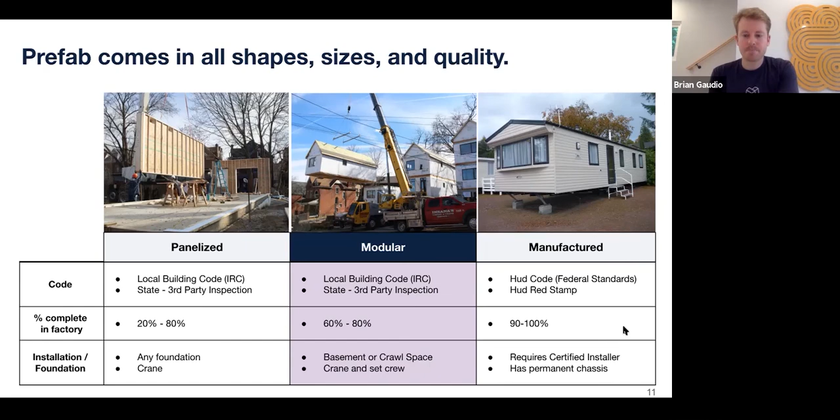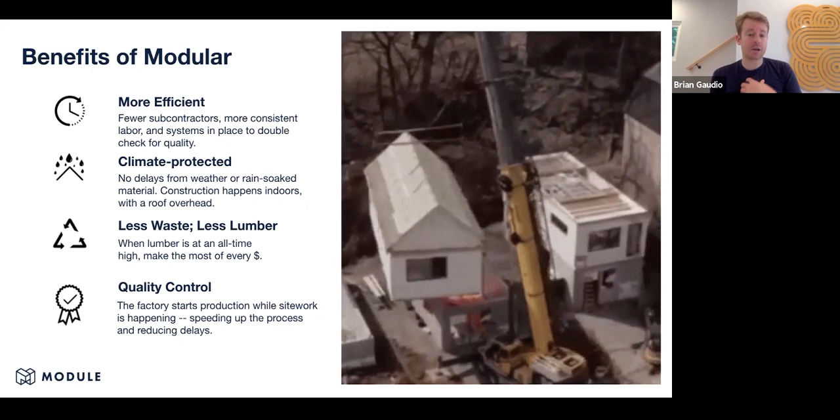So, the benefits: obviously you're going to be able to build faster — that's really one of the main benefits. At the same time you're building the foundation, our factory can be building the actual houses themselves. And there are fewer subcontractors to handle — instead of 20-some subcontractors, you effectively have one super sub, which is the factory handling a large component of the project.

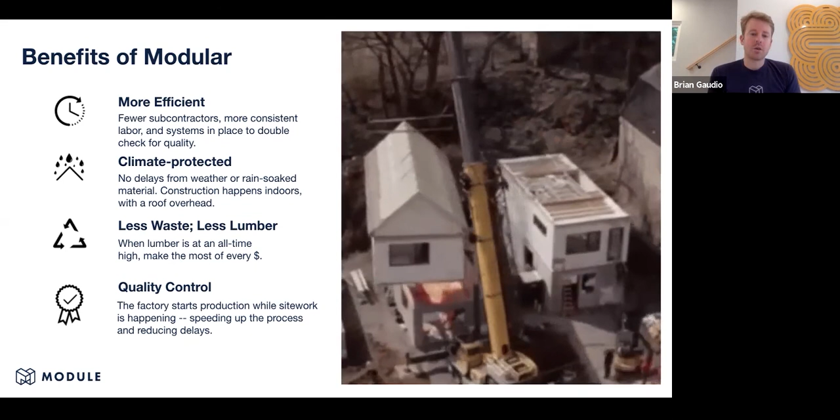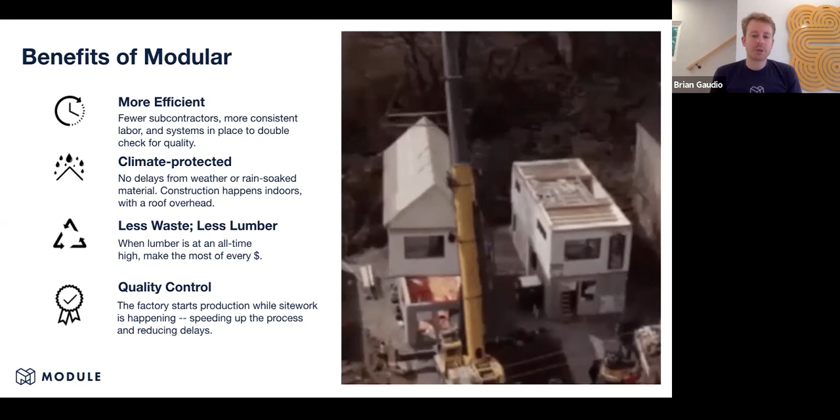If you're building in a climate with weather delays from snow or rain, modular can be a great way to short-circuit that, since you're building in a climate-protected environment. And there's less waste from a sustainability perspective — we don't have a dumpster. If you look at that video, there's no dumpster there, because when you're building in a factory, they can control the waste, resulting in much less on-site waste. So those are some of the benefits of modular.

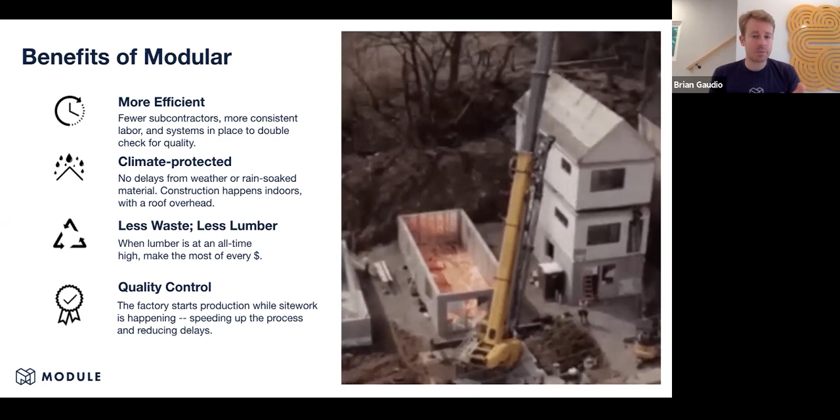It's not necessarily cheaper — that's one common misconception, that modular has to be cheaper. We actually don't think that's the case on projects, generally speaking.

Why mixed income is important: for those of you in the affordable housing world, the previous strategy was to build concentrated large public housing towers in particular areas of the city. What that does is concentrate poverty. With mixed income, you can provide more amenities to the affordable buyer, because they might be in a neighborhood with a better commercial district or more neighborhood amenities than an area with a concentration of public housing. That's why we did the project, and why we think mixed income housing is important.

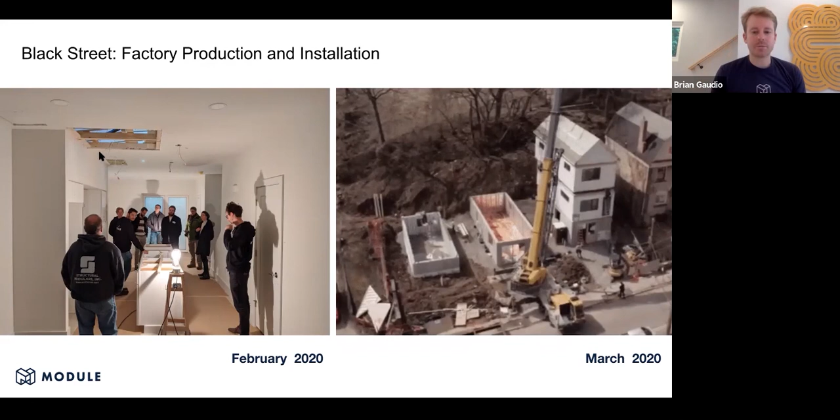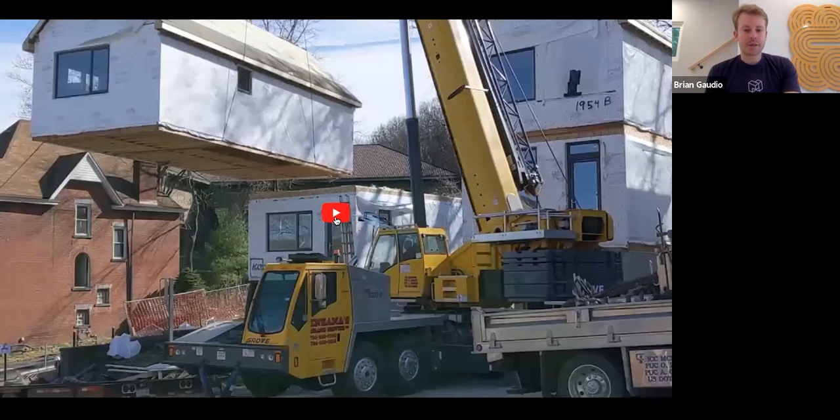This is a little video, Ankur, you can kind of talk through the process. This just has some good footage of the project, generally speaking.

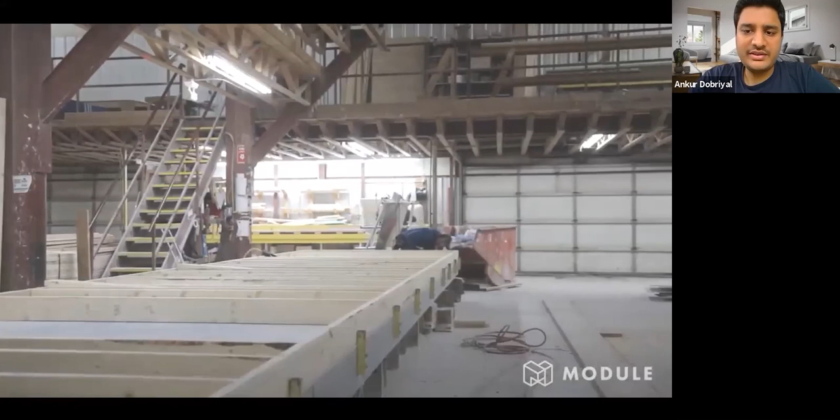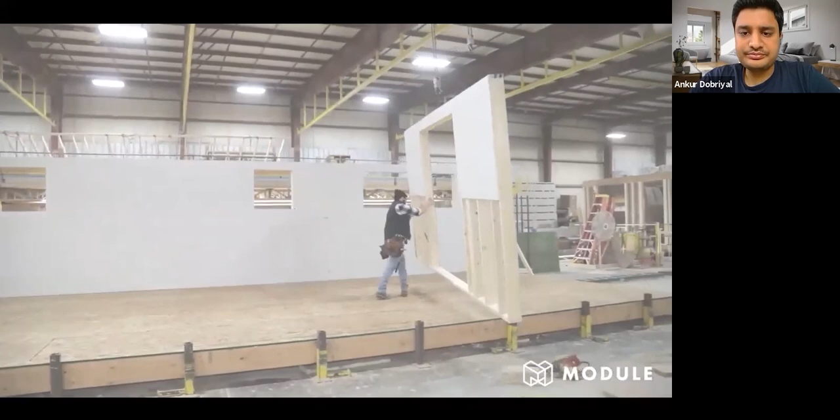So as you guys see on the screen, some footage from the factory. The guy is working on a floor. You'll see different stations that the factory has - that's the first station, where the structure basically gets built. You can see the walls being lifted and placed on the floor. All the exterior and interior walls get done at this station. Also the roof or ceiling, depending on which floor you're in, gets done - you can see a roof structure being placed on that house. At that point, the structure is complete.

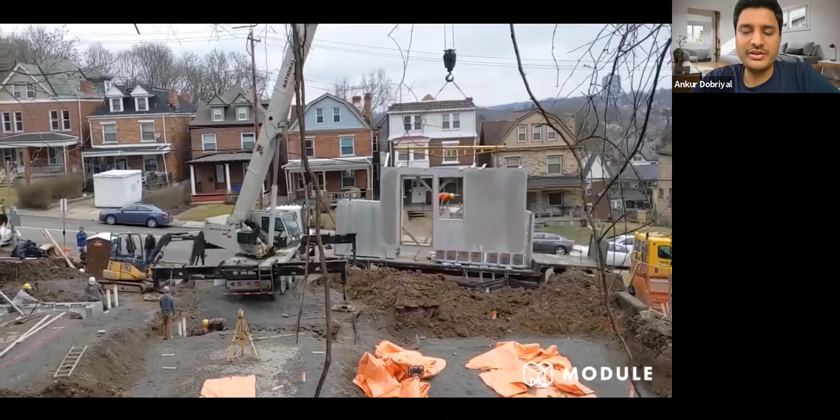This is basically a shot of the foundations being installed. We do a Superior Walls foundation, which is an off-site built foundation. The biggest advantage is we can do it throughout the year, so we don't have to wait for good weather to pour. This set in the video is from February, probably 30 degrees outside - middle of winter, and we're still able to do it.

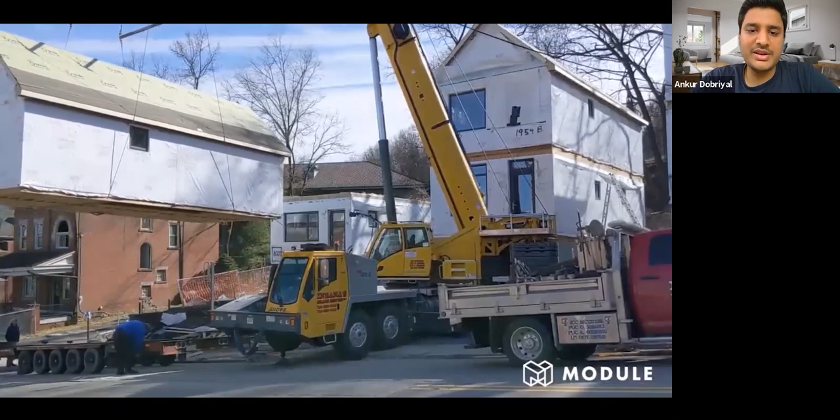This final footage is from when the boxes, or modules, are being set. You can see the roof is pretty much complete as the top box gets lifted and placed on the first box underneath. We had a crane on site and some traffic management stuff, but we were able to do this without really blocking the street, which was good and didn't cause a ton of interruptions for the neighbors.

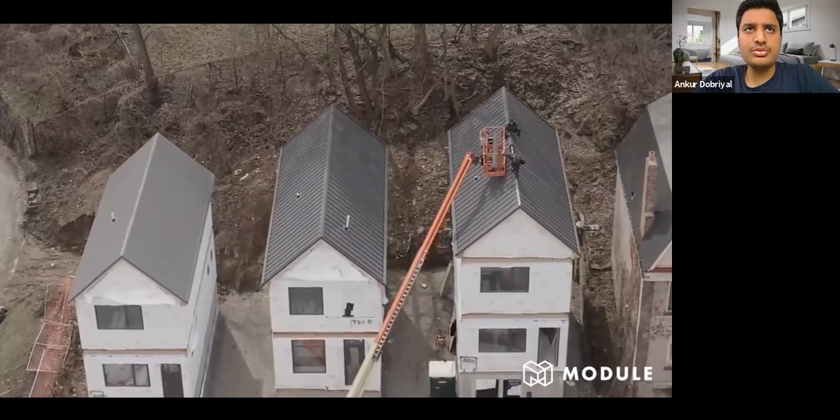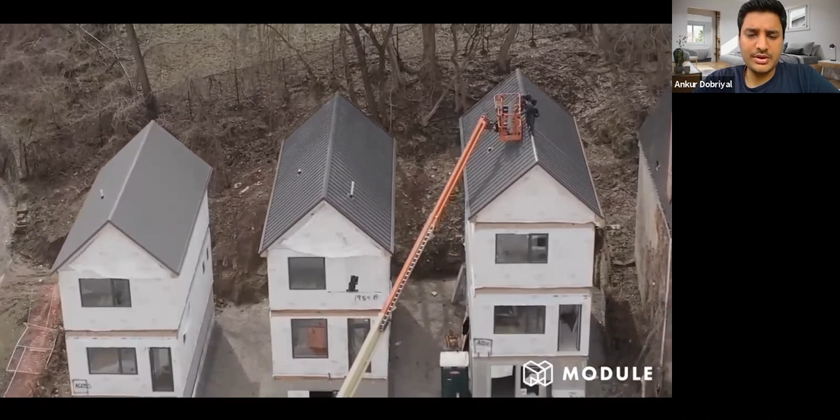The set, essentially what you see on the screen, took us 2 days to do. In total, there were 7 boxes. We have metal roofs on all these houses. I think roughly we could set 2 or 3 houses a day.

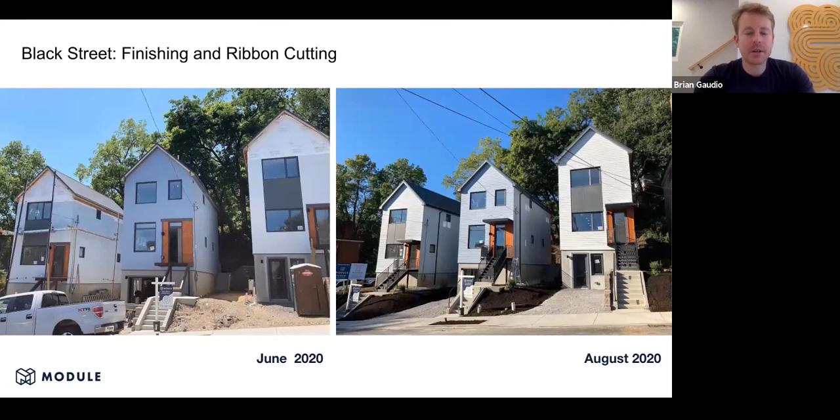In terms of on-site finishes, you'll see that siding, this was a Hardie lap siding completed on site, and then your stairs and stoops, railings and things, those are also done on site after the set.

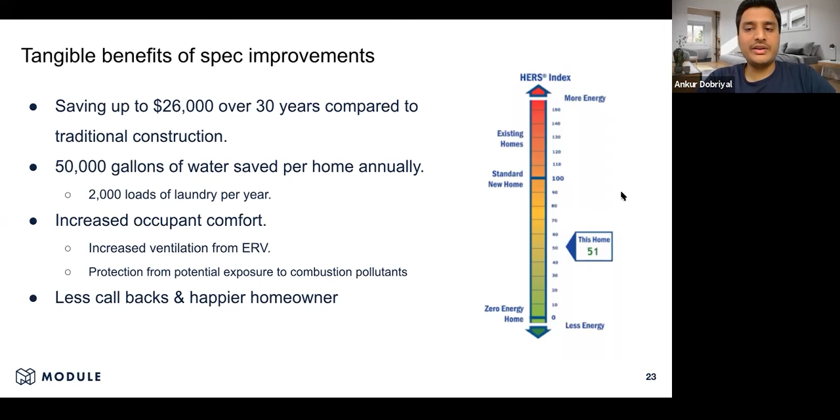So we'll go through a couple of things to consider if you have an infill site that you're looking at, or a piece of land that you're trying to evaluate. A couple of basic first things to consider when looking at your project: will that site support modular installation? We have to understand that boxes are going to come on a truck, so you have to think about the route from the factory to your site. Once they're on site, there's a lot going on—like you saw in that video, there's a crane, there's a set crew, there's going to be traffic. So those are important things to consider.

And so Ankur, let me pop these two sites, and you can just quickly talk through a good site versus a bad site.

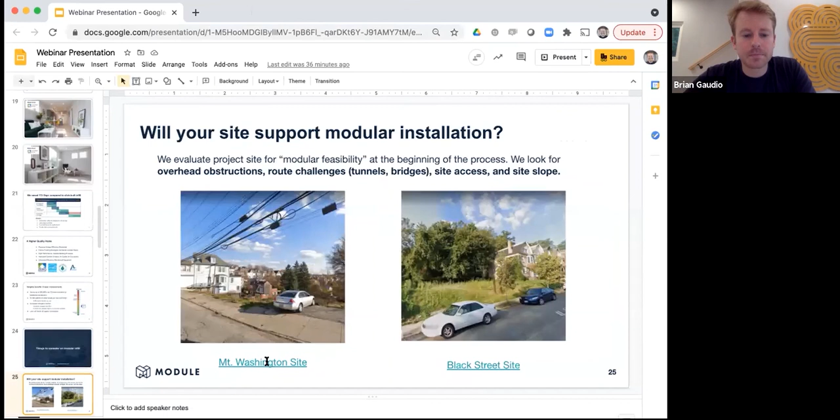So like Brian said, before we go into any site, we have to evaluate that for modular. Not all sites are built equally. So for example, this is a tough site. Right off the bat, you can see power lines right in the front of the property. For building a modular house, yes, you can sometimes lift over power lines, but something like this, which towers high, is hard to get around.

Something else on this site is it slopes to the back significantly. Now there is going to be a building in that corner before we start construction, so it's also going to be an access issue if we have to access from the back. Essentially, the drop from the front to the back of the property is about 30 to 40 feet, and such a drop makes it hard for us to get the crane and the truck to lift those boxes and place them on the foundations. That's why this site is particularly challenging.

Now, if this was a flat site, the power line in the front would still be a slight issue, but you could still go to the back and access the site from there. The slope just makes it worse.

The second site would be what we consider a good site. This is the site on Black Street that the houses we were talking about were built on. You can see no power lines. It's a corner lot, you have corner access. Corner access is not necessary, but it's obviously helpful because it gives you another way to access the site. We actually had a construction entrance through the back.

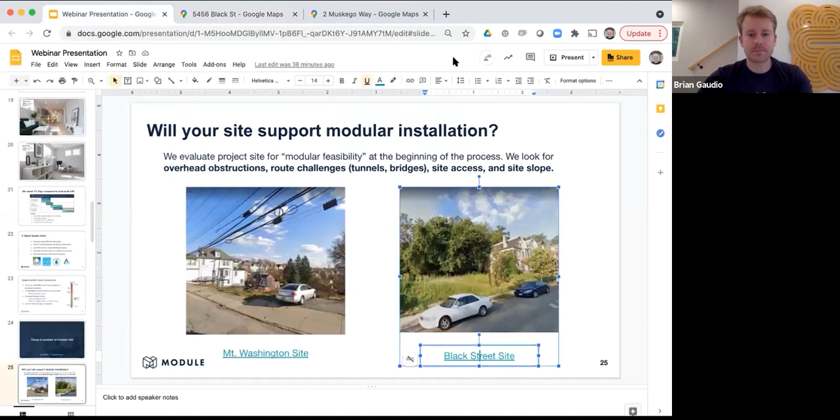Talking a little bit about how the process works. In terms of design and permitting, on a standard project, you have an architect on board, and they do all the drawings from scratch, and you submit to the permit department—that's your standard process. On modular, it's slightly different because the modules are being built not on site, but in a different jurisdiction, could be 200 miles away. That is why most of the modular factories are regulated by the state.

So how this typically works is we have some standard concept plans. You guys can go on our website and look up all the standard plans that we have. We have a stage where we do all the concept plans—the information that goes into these plans we've accumulated over the past 2-3 years. So our team has a good understanding of how the factory works. That's where we start.

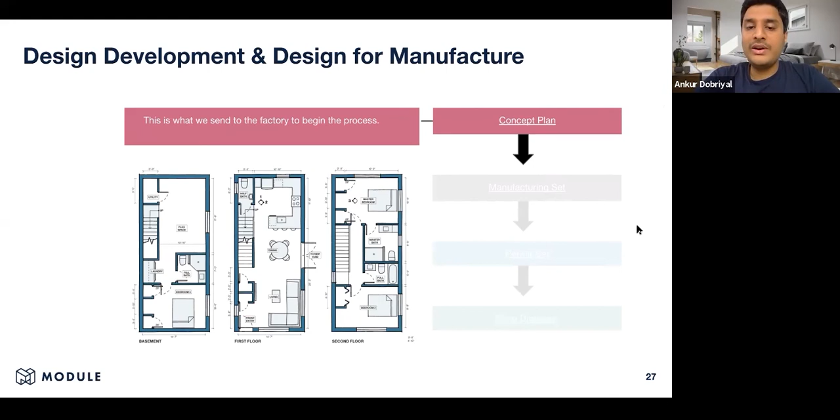Once you as the customer sign off on the concept plans or pick a concept plan, we go to the next step, called the manufacturing plan. The manufacturing plan essentially gives the manufacturer or the factory the ability to draw our concept plan in a way that the state permit guys would understand, because that's essentially who's stamping the drawings. They also check for any sort of issues with the code or issues with the assembly line that might occur. So it's a pretty small timeline for any of our standard plans, because we've already gone through those exercises.

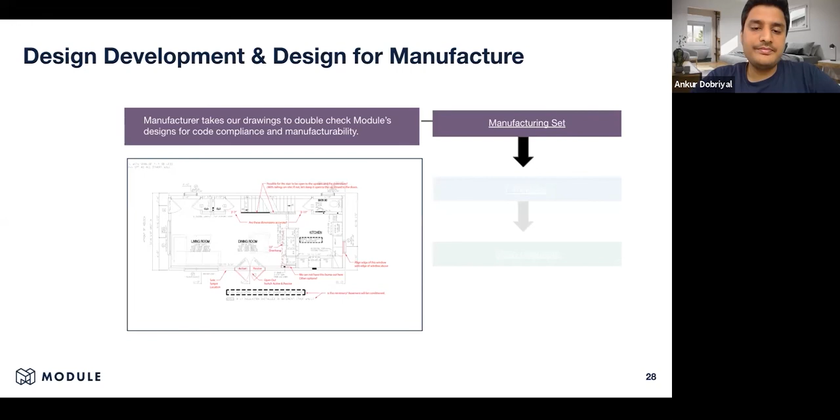So manufacturing plan would be the next step. Once we sign off on the manufacturing plans, we would go to what is called a permit set. Now, permit set would have all the information needed by the state and third parties to stamp those drawings. Once we have the state approved drawings, we then submit it to the city like any other project.

Any accessory structures, porches, garages, decks that are done on site are added as supplements to this permit set from the factory. We will work with our architect partners or a local architect you might already be working with to incorporate all those accessory structures into one permit set and then submit it to the city.

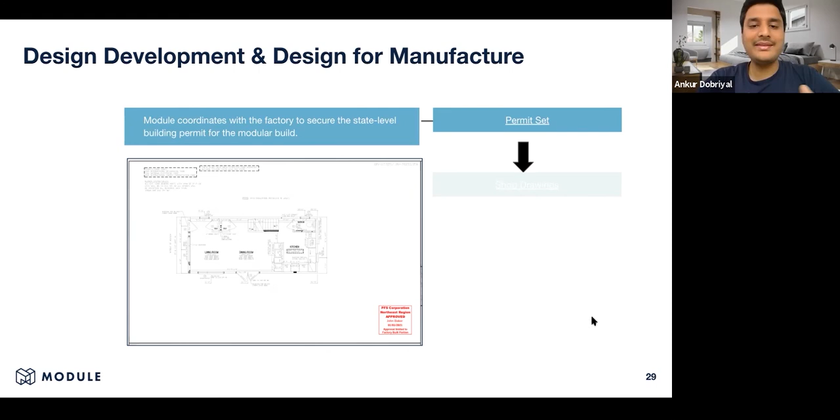Finally, once you get permits, you're ready to begin. You place deposits with us. The next step would be shop drawings, which is essentially what exactly gets built. These shop drawings will form as a directive for the people in the factory when they're building those houses, and will also serve as built drawings for when the houses are delivered. This will be the set that you will own as the homeowner.

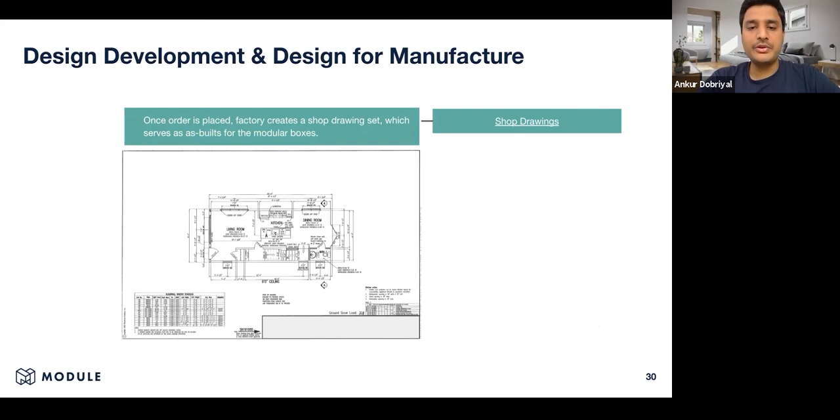So yeah, a couple of small line items we want to discuss about what things we do and what things are the developer or general contractor's responsibility. All of the design and specs of our base units are from us, and we have the construction estimates to go with it. We would also manage the state and help with the city permit process. In terms of construction, we would be delivering and setting the boxes, and pretty much everything above the foundations could be worked into module responsibility.

Some things like siding might be more site specific, so we leave that on the developer or local GC to finish, but everything apart from that is finished by us. The other things you as the developer or GC might have to do is work on the site plan, get zoning approvals, work with us on the city permits, and do all your excavation and site work.

This is a very basic roles and responsibilities chart, but for each project we develop a very detailed set so we can help you as the developer or builder make sure you're getting the right price from your GC on the remaining items to complete. What's really great about using modular as a delivery method is that you get those pricing estimates much more quickly if you use one of our standard designs than if you were to go from scratch with an architect. So you can get to whether or not a project pencils much faster with us.